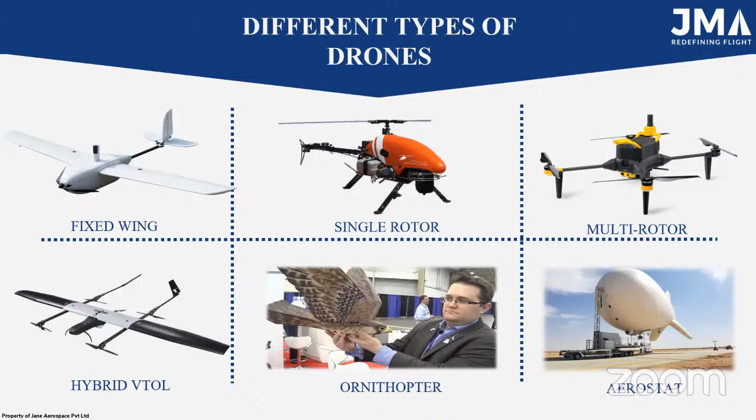So that being said, let's take a look at the different types of drones that are there. These are broad classifications. There are multiple other variants as well, but then all of them majorly fall within these 6 categories.

Initially, it did start off as an aerostat way back in the later part of the 1800s, when Venice was trying to be bombed by the Austrian army. They loaded bombs into balloons, and then they tried to drop those bombs over Venice. So that's how it started.

But then more dominance came with the fixed wing. It looks like a normal aeroplane. The advantage of a fixed wing is it has a longer endurance and range, so it can fly for a long time. But the disadvantage is you will need a clear runway to take off or land, or you will need to hand launch it or catapult launch it. So that's another headache it comes with.

Then we saw the advent of the rotary wing drones. Here you see the single rotor heli - heli is short for helicopter, so that's a heli drone. You can take off vertical and land vertical, you don't need a runway - that's one of the greater advantages. And you can have a larger payload, you can hover in the air, and you can maneuver really fast. So those are the different advantages of a single rotor.

Then came the multi-rotor concept. Having all the benefits of the VTOL, it was more of a stable platform, and that way it did not - because the heli is a difficult platform to control. Multi-rotors are pretty much more stable when compared to the heli, and then can lift heavier payloads when compared to the size to payload ratio.

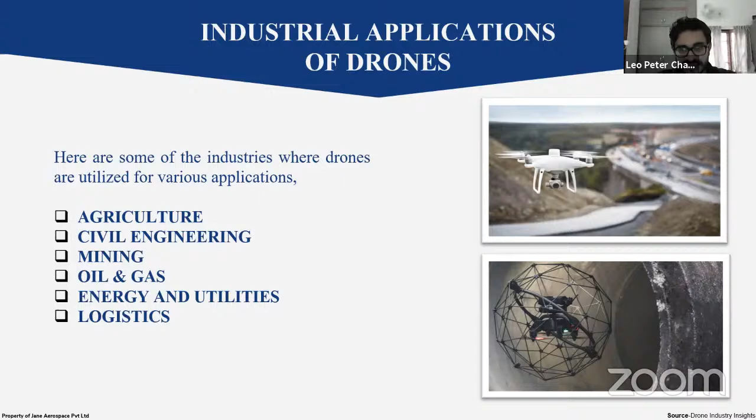So, agriculture. Majorly everything was manual, and then tractors came, and then harvesters came, and today seeing bulls being used to plow the field is a very rare phenomenon. We have high power tractors and tillers, all fully mechanized. And Punjab is the very best example, where they use laser guiding technology to even level the field for paddy and wheat cultivation. So we've reached that space.

Now, how has drones really transformed this space, and how is it transforming here? It's very interesting to know Yamaha had the RMAX heli drone 20 years ago, where they started spraying the fields of Japan, both for pesticide, liquid fertilizers, as well as seed dispersing. So that's how early it started in the agriculture space.

And today we have multiple different other applications also coming into picture. We have crop monitoring, health monitoring, crop insurance assessment using drones. We have irrigation management, pesticide spraying, liquid fertilizer spraying, micronutrient spraying, seed dispersal, granular fertilizer dispersal. All of this is being done through drones today.

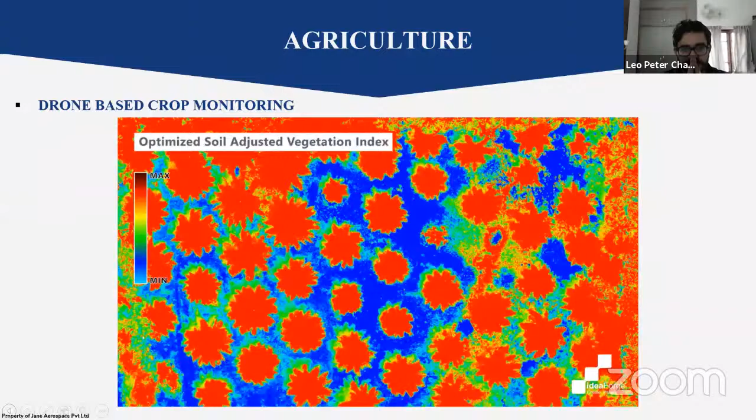So you must be wondering, what are these colorful images? Now this is called multispectral analysis. So the camera or the sensor that is used captures images in different spectrums of the electromagnetic radiation. So you have the RGB in the visual range, the red, green and blue. And then you have the infrared and near infrared regions. Now what this does is, so we see the visual spectrum, right? We cannot see in the ultraviolet or infrared regions. Now, but other animals can. That's how they work their way, like how bees can see the UV spectrum and all of that.

Now, every plant emits different radiation when it is under different types of stresses. So this study is done through agricultural universities, and they have these data sets. So when we map and then we get these different readings or different data sets in different spectrums, we compare it with the existing data set that the university has.

Now, let's say there's a lot of stress as shown by an infrared image. Then we know that's definitely something to do with water stress, either there's too much water or too little water, and then irrigation has to be managed accordingly.

And plant will also show a difference in the RGB spectrum when it has pest attack or some infection. Based on what type of color ranges are there, you compare it with a regular template and see what might be that infection, because a plant can only get definite amounts of infection. It's not prone to all types. So be it bacteria, fungal, or a pest attack, you will be able to understand.

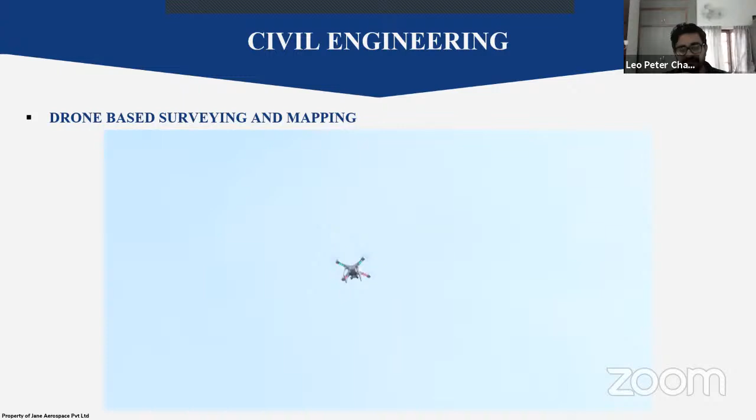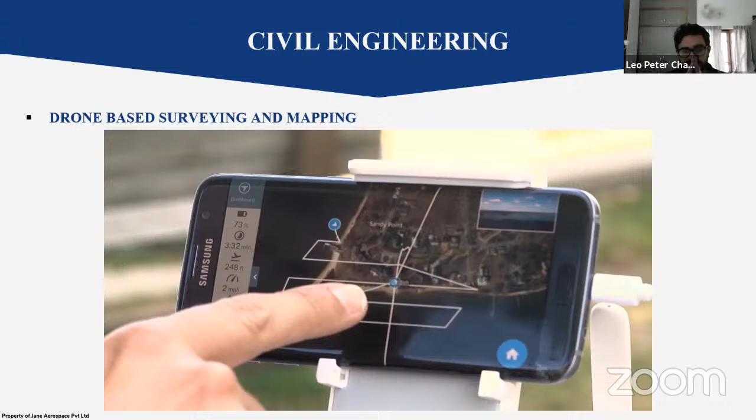So we can see a live feed of the photos that it's taking here. The drone is moving along this path here, and if at any point I need to take control, I can hit the switch here to a different mode and then manually pilot it back. Just for safety, I do need to keep an eye on it, make sure nobody gets underneath it. It's going 28 miles an hour now. All right, and that wraps it up, and I guess it'll probably, yeah, so now it'll draw a line back to the return point where it started.

The entire process is autonomous. The drone will automatically land roughly where it took off. That was pretty close to the tree, but sometimes it lands 10 or 15 feet away. Ah, shit, I'm gonna have to take control.

Be sure you take off from a big, flat area. It doesn't need to be in the area you're photographing.

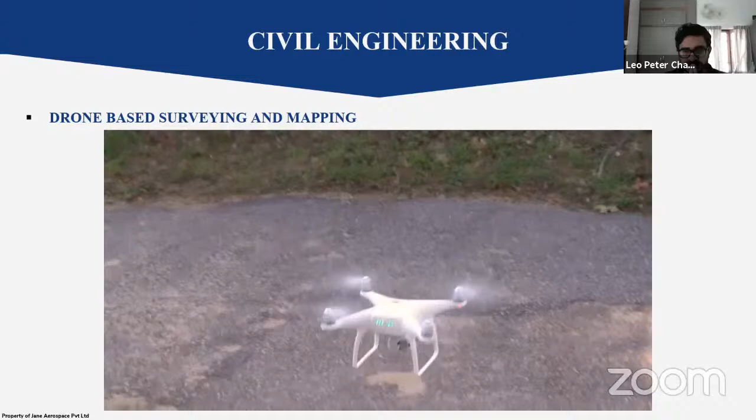Using your computer's memory card reader, upload your images to dronedeploy.com, then wait a few hours while they process it. When your map is ready, Drone Deploy shows your higher quality 2D map overlaid on satellite maps.

Click 3D and then double-click the middle of the map to make it easier to navigate. Drag your mouse to rotate it, or hold the Shift key while dragging to move around. Use the scroll wheel to zoom in and out. There are some settings you can adjust to see more about how the model was built.

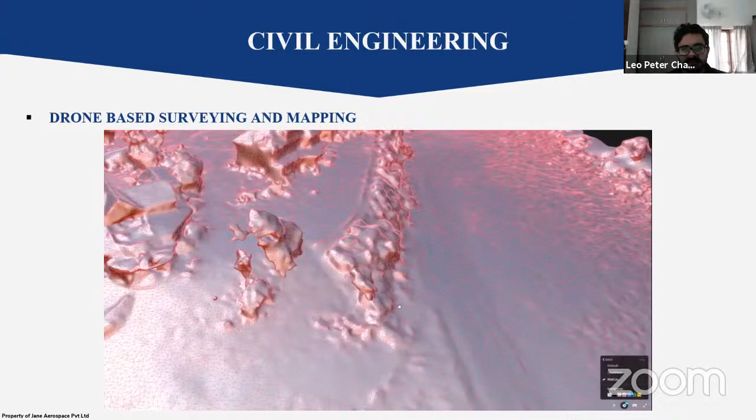Gradual elevation shift should look great, but the sides of buildings will look like a melting nightmare. Flying your drone lower improves the quality, so change the elevation.

But if you want to get the best quality for buildings, manually fly your drone after you've done the Drone Deploy automated routine, and take dozens or hundreds of lower altitude pictures with the camera angled diagonally rather than pointing straight down. If Drone Deploy flies it at 200 or 300 feet, you want to come down lower, like 100 feet.

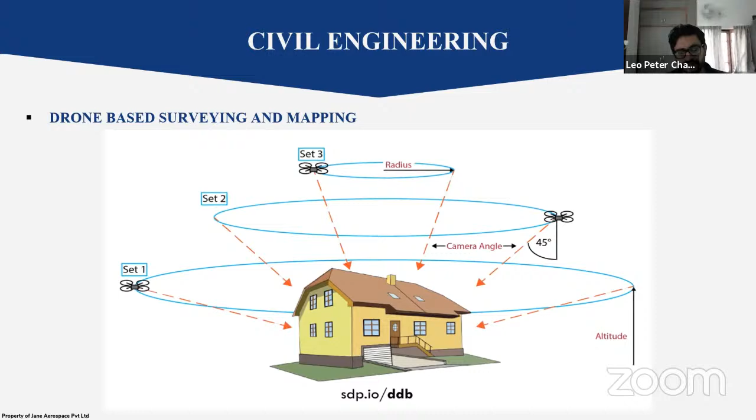50 feet, even 25 feet, and tilt the camera more towards the building so you can see the side of the building. Then just move it to the side and rotate around the building, snapping lots of overlapping pictures at different altitudes and different angles.

You can use the orbit feature in the DJI Go app to circle a building while manually snapping overlapping photos. To get images of this backyard, I kept the device stationary, but rotated it, spun it, slowly while taking photos.

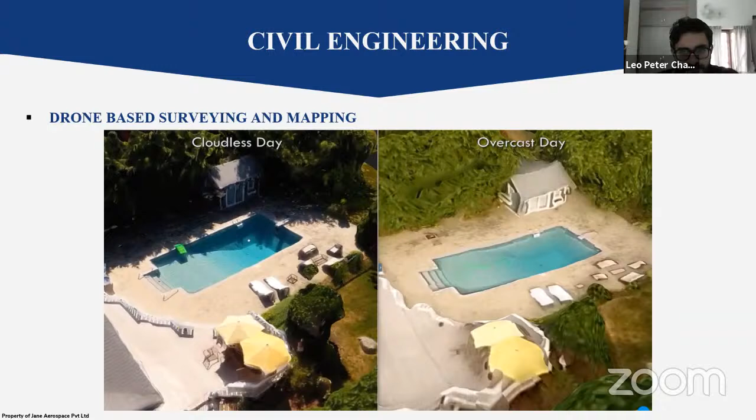Overcast days provide soft, even light without hard shadows, and generally make the best 3D models. If you must fly on a cloudless day, fly when the sun is high in the sky to minimize shadows.

If Drone Deploy can see the bottom of a body of water, it will be able to map the depth. You can use that model to calculate the volume and depth of a pool or lake. You have to subscribe to the higher level option at Drone Deploy, so you have to pay a little.

So here you can see how easy it is to build a 3D map, right? And also the most important part was how you could calculate volume. If you had to calculate the volume of that swimming pool, it would have been very difficult, but with oblique photos and a higher density of photographs taken over that area, you can actually calculate volume.

So that's a space where it has been helping the mining companies to do that. We will see that later.

To map an area of 1 square kilometer just takes roughly an hour. So 1 square kilometer is roughly 247 acres, right? Imagine walking through that distance. That would itself take so much time for anybody surveying it.

So this is how easy it is to do mapping and survey using drones. And you can learn it in about a day's time. That's how simple it is as well. Next slide, please.

Now it's absolutely possible to do in normal conditions itself. Next slide.

The Aeryon Scout is a quad rotor. I just click on the map telling it where I want it to go and it'll just go there. I have the ability to create a target for the camera to look at. If I fly around in a circle, it'll keep that target in the camera at all times.

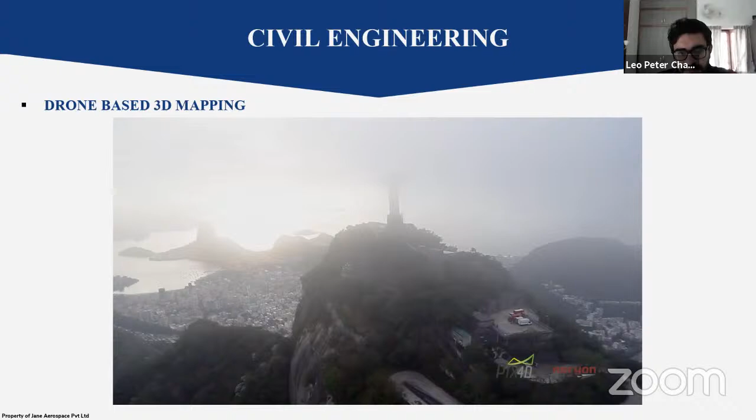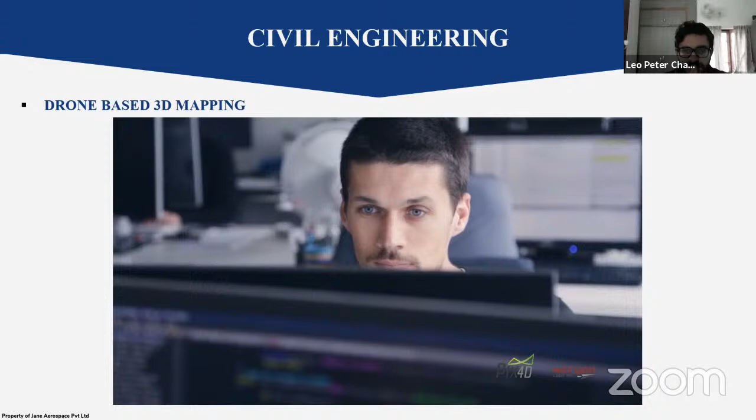The way our software works is it's using similar techniques that humans use when they use their two eyes to perceive their world in 3D. But instead of using only two eyes or two cameras, we are using thousands of images captured by a drone to combine all together to have a consistent 3D model.

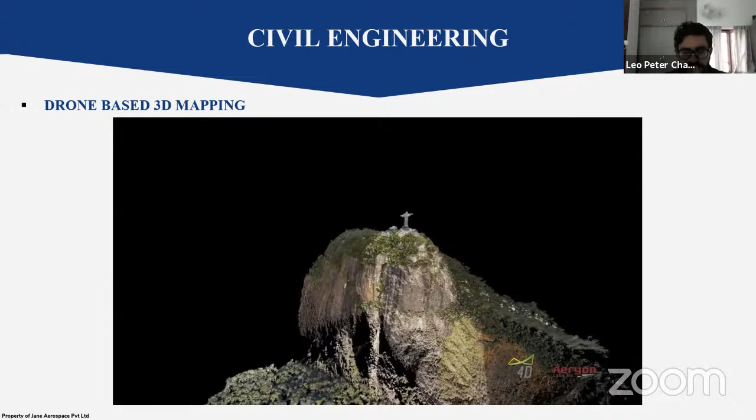So here you see how easy it is to create 3D models of large structures. A very simple example: if there are architecture students, let's say you want to create a replica of any existing archaeological site or important monument. You just fly the drone, get the entire 3D model as accurate as possible, and then 3D print it. That's how simple it becomes, so that way you can produce faster replicas.

And if you're able to get drones like Skydio and fly them inside those buildings, you will be able to build or print the model both from the internal and the external perspective. That's in itself a whole new business together.

And this proves effective - the statue of Jesus would have been done in a day's time, and then they would have finished processing in another day's time. And if you have to replicate it, depending upon what size model you want to build, that printing time will be included. Otherwise, building that entire structure would take a lot of time to get the same amount of detailing. So this is another use case of drones and 3D mapping in the construction and architecture industry.

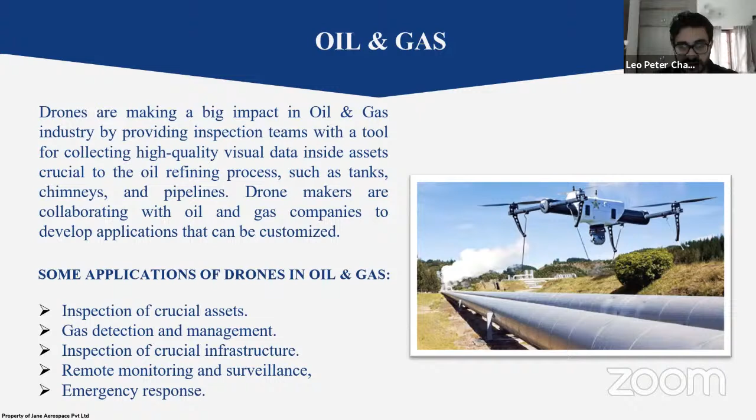You get high resolution images from all angles, and 3D reconstruction of your chimney for better understanding of where the problem lies can also be done. So this really transformed the industry, and in oil and gas it is definitely making a lot of impact. Let's take a look at the applications.

The big differentiator is that they've integrated it into one package. The data is stored on the UAV, so you can easily download it once you're on the ground. Once we land, we can Bluetooth the data down in literally less than a minute, bring it into a separate app on the same tablet, view it and review it, and make sure we've got everything that we need.

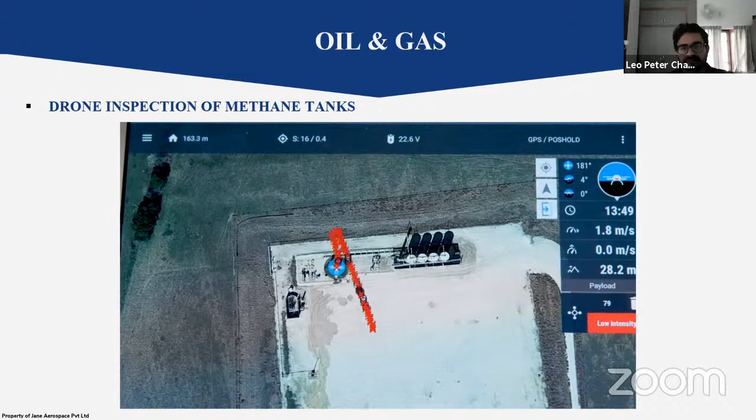And then we can also drag it out into some other type of GIS database like Google Earth. You use the MD Viewer app to import the data, download the CSV file, and you can take that tablet back to the office - it can't get any easier than that.

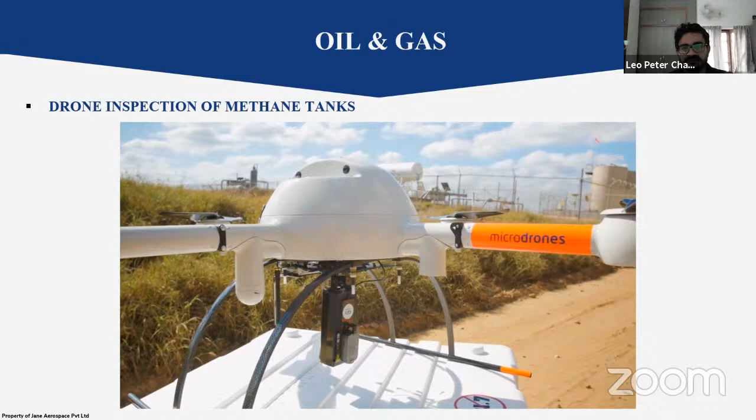The Microdrones M Detector 1000 series - you're able to not only map out the data that has been collected from the UAV after the fact, but also see real-time what the drone is viewing. So you can see a first-person view of what the sensor is looking at if you're flying over a pipeline, to ensure you're staying over that pipeline, as well as the parts per million in methane gas that it's detecting at that point.

So if you start to see that you're detecting gas in a certain area, you can stop the waypoint mission and actually fly over that area to pinpoint where that methane gas leak is coming from. It turned it from going back to the office and doing a bunch of filters and sorts in Excel to being able to analyze the data right out here in the field.

So this is methane gas detection. Methane is hazardous, and today they're using drones to detect these gases. You also have other spectrum analyzers that could help you understand other exhaust gases in these industries.

The problem generally is putting a human in such a situation requires industrial masks and all the PPE kits that come along with it. But now with drones, humans can be at a safer distance and have the drone fly over these regions. It's a very simple process of getting data at the location itself rather than coming back to their offices and running a bunch of processes. This way it's transforming how quickly the result is available to the client, reducing the time required for taking action. Drones are doing a big favor in that sector.

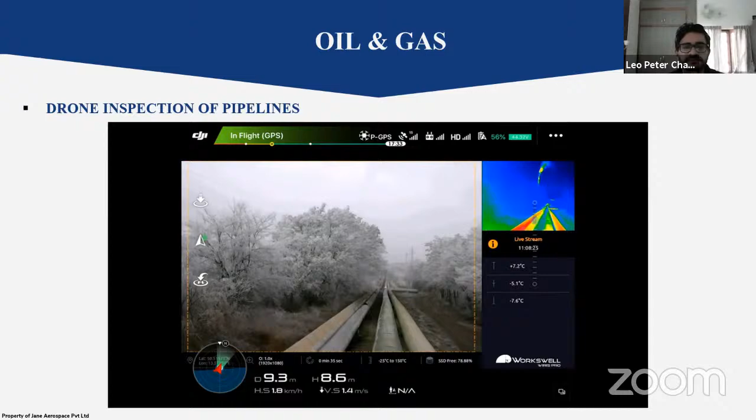Here you could see how they are inspecting for leaks and accumulations in pipelines. What you saw was a radiometric thermal camera being used, which can detect temperatures in real time. The other beautiful part about this technology is when you have an LTE connection, you're able to transmit this data that is being captured real time to a centralized command center or to the head office of the client where they could view it live.

If it's a very crucial asset, and somebody higher up in the management would like to know what is really happening, you can do this live transmission, and they don't have to wait for the data to be shipped to that location. That's another advantage of using drones, and with high-speed internet, it has really transformed how fast you can access those data sets. Next slide, please.

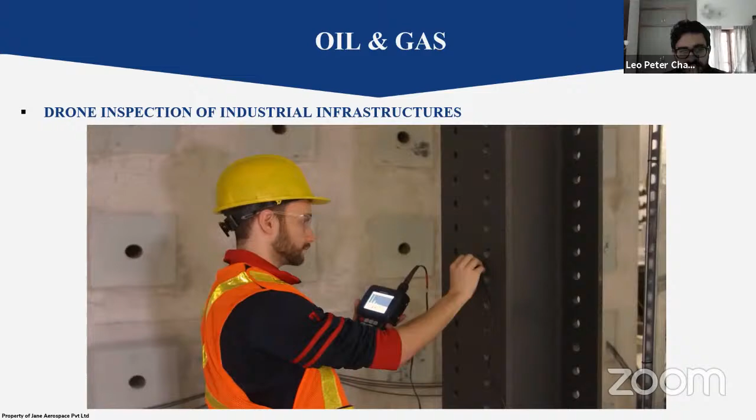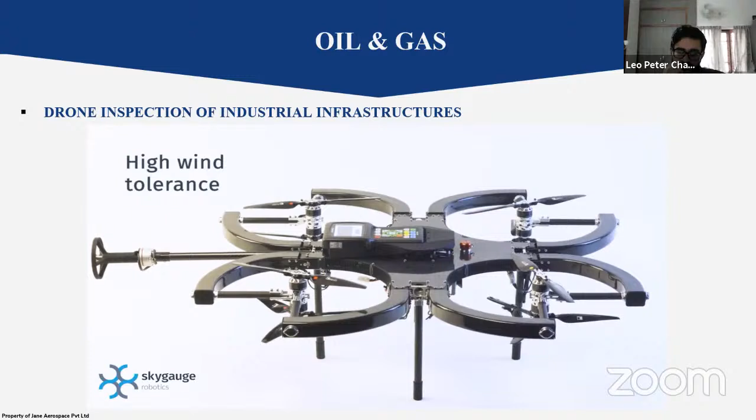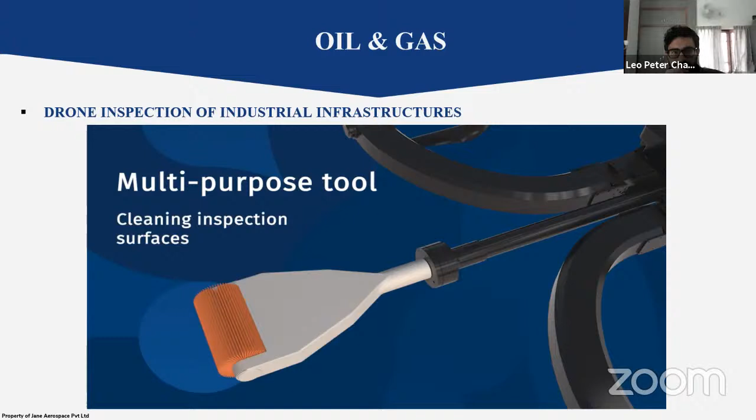Introducing the Skygauge, an interesting application. This unmanned system was designed for visual, ultrasonic, and wall thickness inspection. Using the Sky Gauge, workers stay on the ground while the drone performs inspections in hazardous locations. Stability is fundamental for collecting thickness data because the inspection requires precise contact with the surface in predetermined locations. The Sky Gauge is uniquely suited for this by reinventing how drones fly. It features a stable frame by tilting the rotors to control the aircraft. Flying near structures creates strong air turbulence. The tilting rotors instantaneously correct for turbulence, wind, and gusts to maintain precise contact. If a single data point is not enough, the Sky Gauge is able to perform a continuous linear scan. The Sky Gauge can hover at any angle with the tilting rotor design. This is ideal for inspecting sloped or curved surfaces. But most of all, the Sky Gauge is a multi-purpose tool for inspectors. Attach a wire brush for cleaning inspection surfaces, an angle beam probe for weld inspections, or a phased array probe for corrosion mapping. The Sky Gauge is a revolutionary drone for any inspection. Improve worker safety, reduce downtime, and minimize cost. Discover what the Sky Gauge can do for you and your inspection teams.

So this is a really interesting drone, even with the way it is built. The applications you can achieve with it are very useful. One is ultrasonic thickness testing, as I was talking about. Then you could do weld inspections. You could also do continuous inspection on different types of surfaces - it need not be only straight, it can also be curved. All of this in a very short span of time.

Maybe when there is downtime on a Sunday, or on an annual or monthly maintenance day, you can just use this, get all that data, and give them a report. That way the factory owners are always aware of the structural integrity of the infrastructure they have, and it happens at a fraction of the cost. When I did this project for Godrej, the cost for them came down almost by 10 times. So that's the advantage drones provide, both in terms of technology, accessibility, and economics.

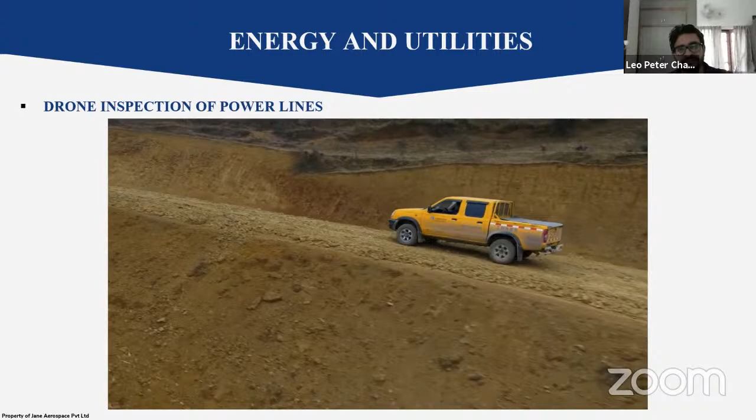Reliability and security are the first things to consider when choosing a drone to carry out electrical inspections. The new Matrice 210 RTK includes a built-in DRTK system to withstand electromagnetic interference and reliably hover around power lines and pylons.

Although the RTK system assists with flying close to power lines, inexperienced pilots still need to be cautious when at this distance.

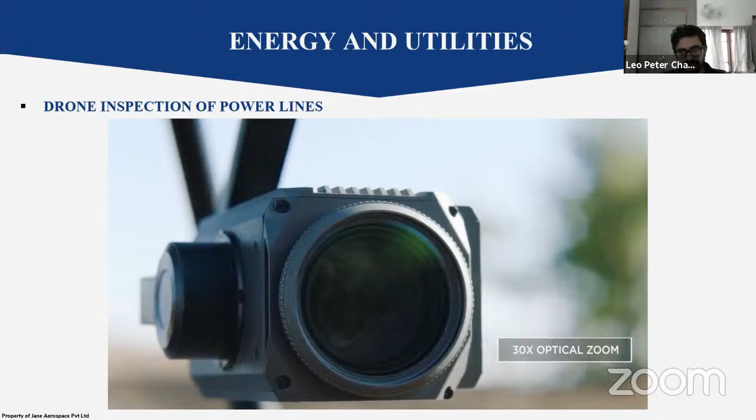Mission safety can be increased significantly if mounting the ZenMuse Z30 camera on the Matrice 210. This adds 30 times optical zoom, allowing you to inspect minute details from 10 meters away.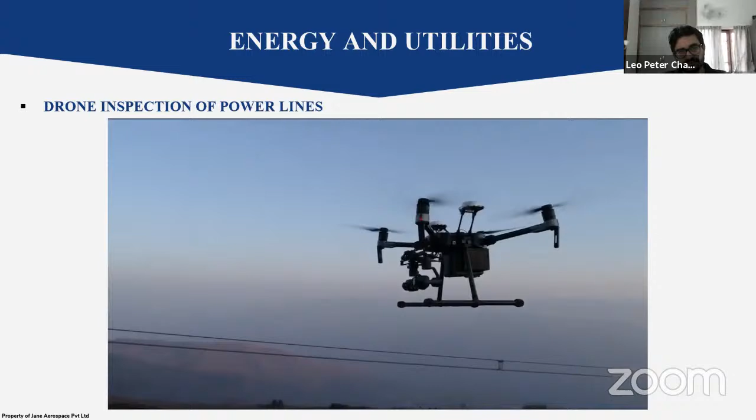To identify all potential issues, inspectors must use visual and thermal imaging. With the Matrice 210 models, pilots can now fly two cameras at the same time and switch between visual or thermal imaging in real time to identify and locate faults. This dual gimbal configuration decreases the time needed to inspect one pylon to only 10 to 15 minutes. With multiple intelligent features and a new dual gimbal system, the Matrice 210 is a reliable and convenient tool for powerline inspection teams. It eliminates the need for dangerous inspection practices and significantly improves project turnaround times.

Anyways, this is DJI, the world's largest drone company. And here you can see how easy it is to inspect those lines, those towers in a hilly province as well. Previously, they would have hired a helicopter to do it, or people would have manually climbed up to do it, both of which are either risky or too expensive. Today, drones are doing it much safer and at a fraction of the cost. Next video, please.

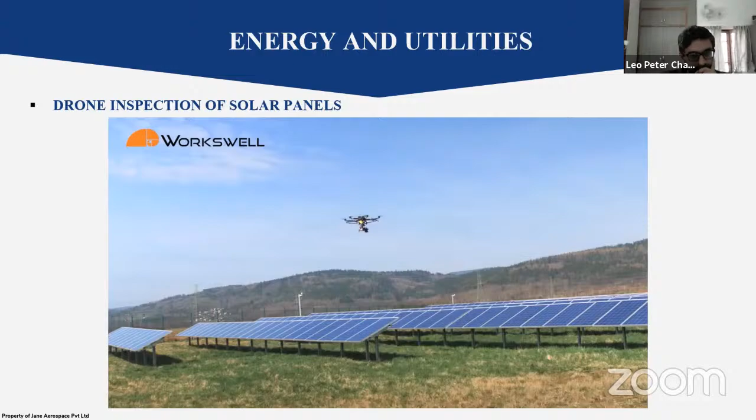So this is thermal imaging for solar panel inspection. With this, you can find out diode failure, you can find out string failure, and you can also find out bird droppings, which is also a huge problem because efficiency drops over these panels. With high resolution cameras, you can also pinpoint the location, because each photograph is geotagged, with its own lat and long details. Based on that, you can say it is exactly at this location.

So, drone inspection of a thermal power plant. Let's take a look at this. This is also called GPS denied area inspection, for inside boilers and chimneys.

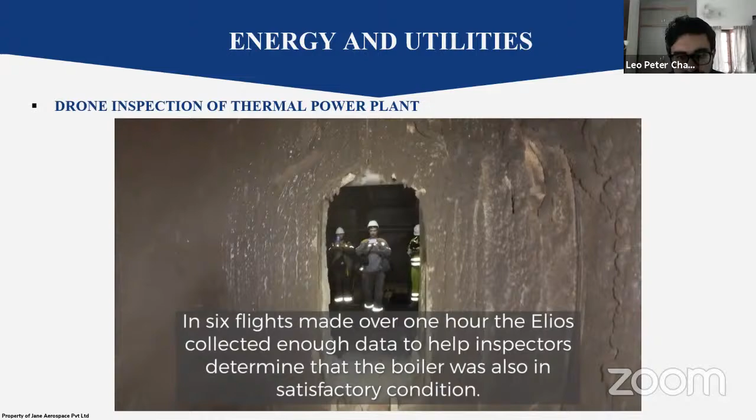So here the drone is in a cage, and it's just 40 centimeters in diameter including the cage, and it can go through nooks and openings that would generally be difficult for a human being to go through. And it's safe, nobody is put in harm's way. You saw the amount of ash that was there in that location. So that way, drones have been helping and transforming the way we inspect GPS denied areas or internal components of boilers, chimneys and stacks.

Next slide. Mining is another segment that is utilizing drones in a very large way. One is volumetric analysis or stockpile management. Second is building maps of the mines itself using drones and LiDAR. Assessment of quantity of ore before and after blasting. And if you have dangerous gases coming out, as we saw earlier, even that gas detection is being done through a drone. So let's take a look at it.

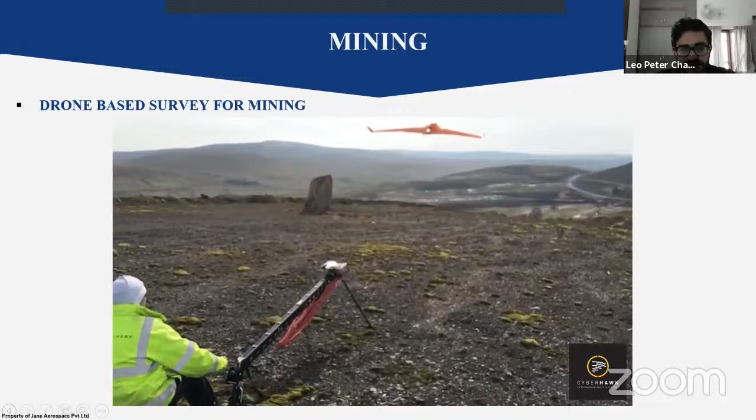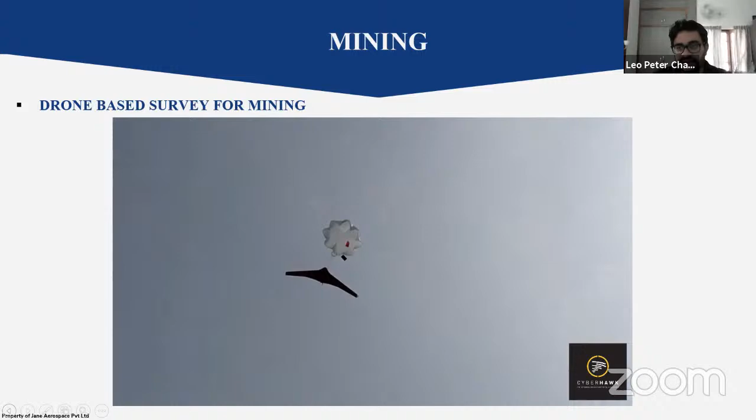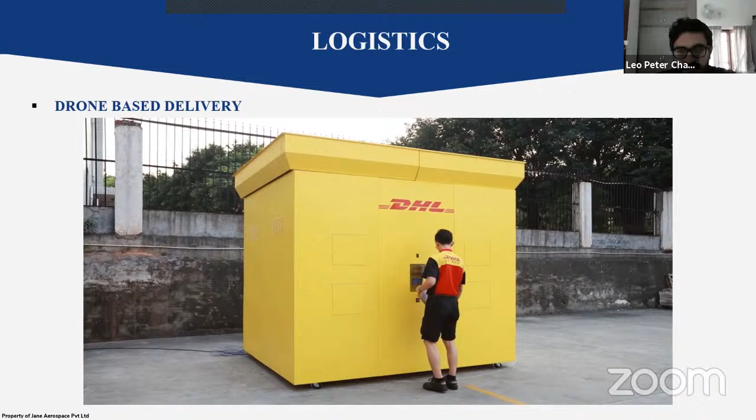DHL have done it again. They've entered into a strategic partnership with EHang to develop a fully automated and intelligent smart drone delivery solution to tackle last-mile delivery challenges in urban areas of China. The launch ceremony was held today at the EHang Command and Control Center in Guangzhou, with the attendance of senior executives from both companies. This cutting-edge solution takes its inaugural flight for a DHL customer, making DHL the first international express company to provide such a service in China.

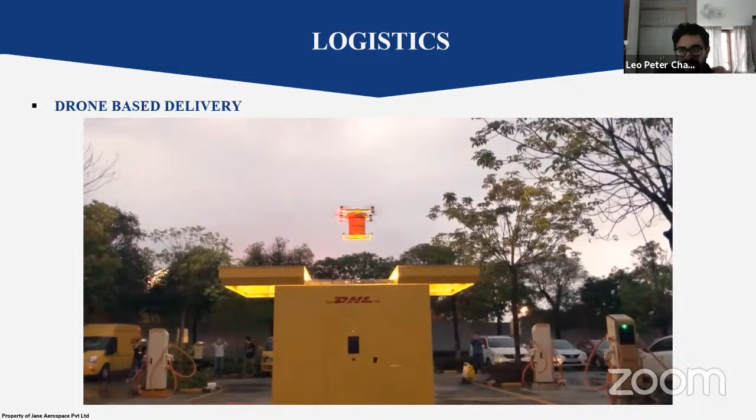Comes as no surprise that the launch pad is situated between some fast chargers for electric vehicles. I think we'd like to see what's inside that box, where the package goes into one space and then gets put into the drones. But that's neither here nor there.

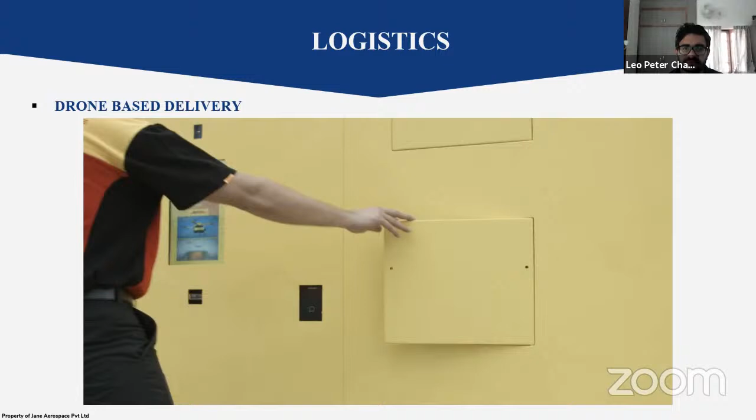The new customized route, exclusively created for a DHL customer, covers a distance of approximately 8 kilometers between the customer premises and the DHL service center, using the most advanced unmanned aerial vehicle in EHang's newly launched Falcon series, featuring the highest level of intelligence, automation, safety and reliability. The new intelligent drone delivery solution overcomes the complex road conditions and traffic congestion common to urban areas. It reduces one-way delivery time from 40 minutes to only 8 minutes and can save costs of up to 80% per delivery, with reduced energy consumption and carbon.

You can imagine having these drone docking stations at your apartment complexes, where food or smaller packages within 5 kilograms can come and be delivered. If you remember, the robot that looks like a dog from Boston Dynamics can actually pick up that parcel and then come right up to your house and deliver. So this automation is happening, and it's not too distant into the future that we will see this going on.

Drone-based inventory management is another interesting area, where they use drones to read barcodes and assess what inventory is available at warehouses. Let's take a look at that.

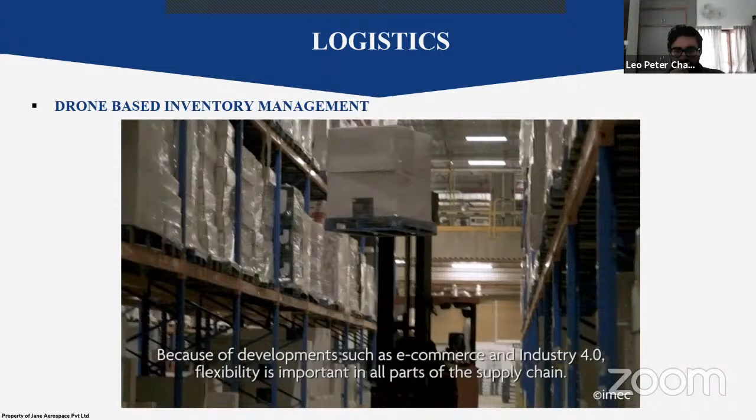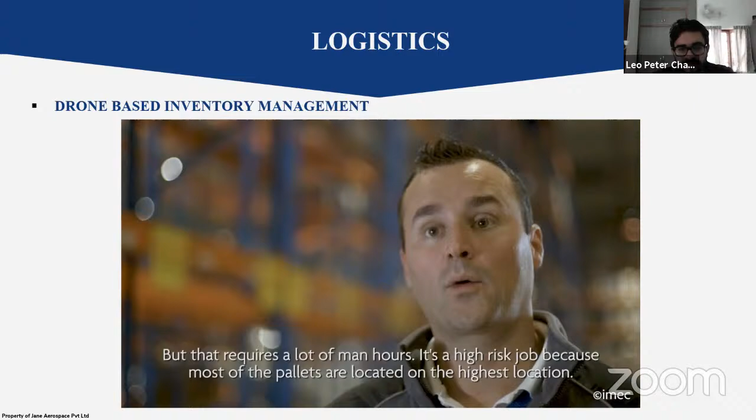Because of developments such as e-commerce and Industry 4.0, flexibility is important in all parts of the supply chain. This also includes warehouses. Specifically, our customers expect that we can give them an accurate and up-to-date stock level at any moment, and inventory enables us to provide it. But that requires a lot of man hours. It's a high-risk job because most of the pallets are located on the highest location, and there is always a chance to make a mistake. That's why we came up with the idea to automate our stock taking with the help of a drone.

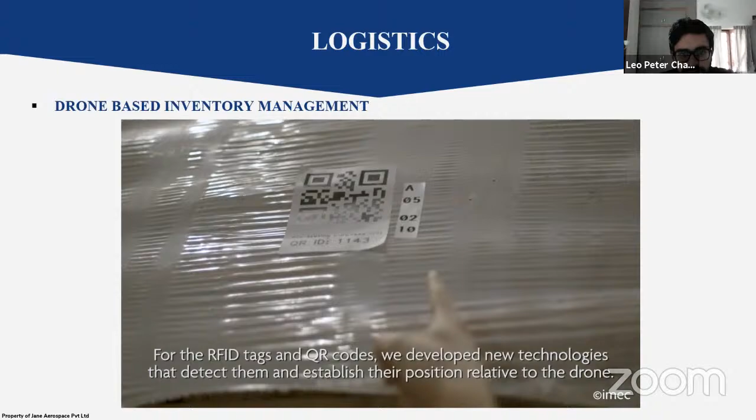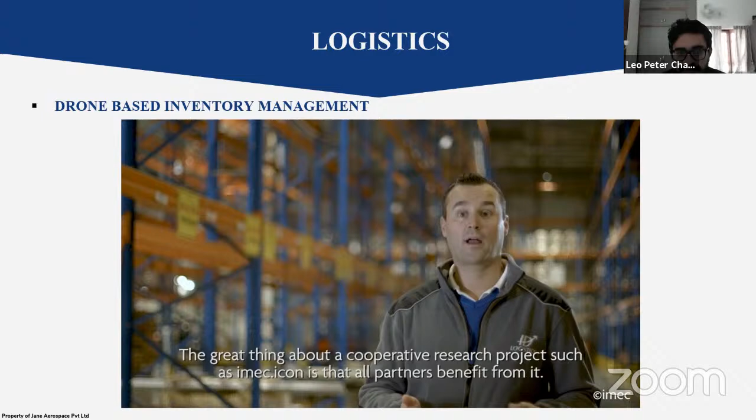The great thing about a cooperative research project such as imec.icon is that all partners benefit from it. At iLogistic, we are already looking at how we can integrate this solution into our activities. The other companies are looking into the possibility of commercialization of their innovation. In this way, InWare Drone strengthens the leading position of the Flemish logistics sector within Europe.

So here you could see how easy it becomes to do inventory management, rather than having to climb up and down and then using a barcode scanner to actually do it manually.